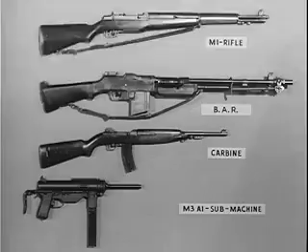The M14 rifle has many of the characteristics of several older weapons. They are the M1 rifle, the previous standard of the United States Army since World War II, the Browning automatic rifle, the carbine, and the submachine gun M3A1. The M14 rifle will, in time, replace these four weapons.

The adoption of the M14, one basic weapon, greatly reduces logistical problems. Moreover, it reduces time for training the user and small arms maintenance personnel.

The new weapon has a 20-round magazine which is quickly and easily replaced. Before removing an empty magazine, the safety is placed on safe. The empty magazine is removed and a loaded magazine is snapped into place so that it is engaged by the rear of the operating rod spring guide and the magazine latch. Now allow the operating rod spring to force the operating rod forward, carrying the bolt with it, to chamber the first round and lock the bolt. The rifle is now cocked and ready to fire when the safety is off.

The magazine also can be replenished from the top with clips of 5 rounds each without removing the magazine from the weapon.

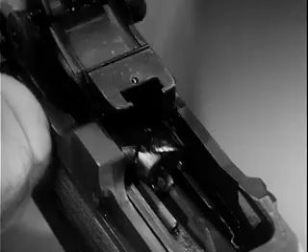To speed up the loading operation for continued firing, the bolt is held to the rear automatically for reloading after the last round in the magazine is fired. This is accomplished by the upward pressure of the magazine follower, forcing the bolt lock into position in front of the bolt. This holds the bolt to the rear while the change of magazine takes place.

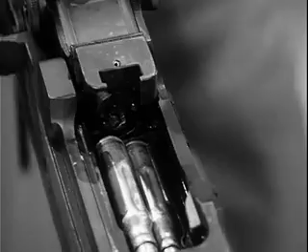By pulling slightly to the rear on the operating rod, the rifleman allows the bolt lock spring to expand, pivoting the bolt lock out from in front of the bolt. This also releases the operating rod. As the operating rod is released, it is driven forward by the expanding operating rod spring, taking the bolt with it. The bolt strips the first round from the magazine for chambering.

Another feature of the M14 is its flash suppressor. Slots in the suppressor act to break up the escaping gases, thus reducing the flash. The suppressor also acts as a muzzle brake, minimizing recoil and giving maximum stability during firing.

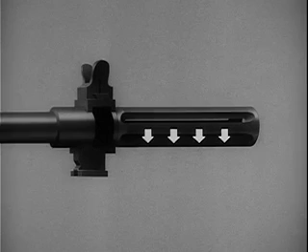This is the way the flash suppressor works. Gas strikes the wide bottom rib of the flash suppressor and exerts downward pressure to keep the rifle stable during firing. Of course, gas escapes in all other directions too.

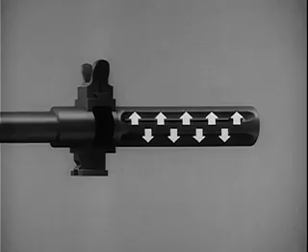When the propellant gas hits the front of the slots, it tends to pull the weapon forward, reducing recoil.

By disassembling or field stripping the weapon, you will become familiar with the parts. To field strip it, first clear the weapon. That is, remove the magazine and check to see there is no round in the chamber. Put the safety in the safe position. Turn the rifle upside down with the muzzle pointing to your left. To remove the firing mechanism, grasp the rear of the trigger guard and pull to your right and pry upward. Then swing up the trigger guard and lift out the firing mechanism.

Separate the stock from the receiver by placing your left hand on the gas cylinder and lifting upward on the butt of the stock. The rifle is now field stripped into its 3 basic groups: the firing mechanism assembly, the stock group, and the barrel and receiver group.

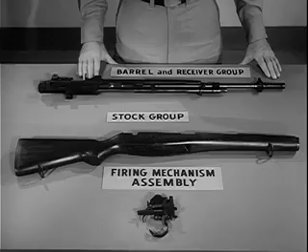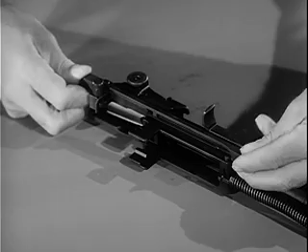To further disassemble the weapon into individual parts, turn the barrel and receiver group on its side with the connector assembly up. To release the connector assembly, press forward on it with the right thumb until the forward end can be lifted off the connector lock. Rotate the connector assembly clockwise until the slot at the rear end is aligned with the elongated stud on the sear release. Then slightly lower the front end of the connector and lift it from the sear release.

To remove the operating rod spring and spring guide, pull forward on the operating rod spring, relieving pressure on the connector lock. Pull the lock outward, then remove the operating rod spring and spring guide.

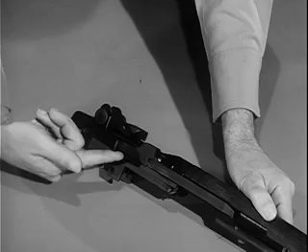Now turn the barrel and receiver group so the sights are up. Retract the operating rod until the guide lug on its lower surface aligns with the disassembly notch on the receiver. Lift the operating rod out and to the rear, disengaging it from the operating rod guide.

To remove the bolt group, grasp it by the roller and, while sliding it forward, lift it upward and outward to the right front with a slight rotating motion. The barrel and receiver group is now field stripped into the connector assembly, the operating rod spring and guide, the operating rod, and the bolt.

These basic groups may be further disassembled if required. The rifle is assembled by reversing the procedure. After reassembly, the rifle should be hand-operated without ammunition to check for freedom of action of the components.

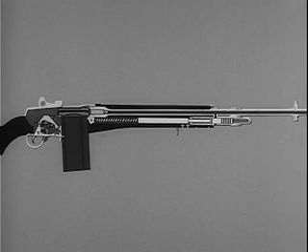The M14 is gas-operated. That is, some of the gas formed by the firing of the cartridge is bled to the gas cylinder.

In the gas cylinder, the gas inside the piston expands. The piston drives the operating rod to the rear, compressing the operating rod spring. Then the compressed operating rod spring expands, driving the operating rod to its forward position.

This combination of backward and forward movements initiated by the firing of each cartridge performs a series of steps known as the cycle of functioning. The cycle of functioning can be broken down into 8 steps. Of course, these are performed as integrated and overlapping actions.

The first step is feeding, which is positioning the cartridge ready for chambering. The second step is chambering, seating the round in the chamber. Third is locking the bolt to the barrel, thus holding the cartridge seated in the chamber so that gas pressure will be maintained in the barrel to propel the bullet. The fourth step is firing, ignition of the primer of the cartridge in the chamber.

Step 5 is unlocking the bolt from the barrel. Step 6 is extraction of the empty cartridge case from the chamber. In step 7, the empty cartridge case is ejected from the weapon. And step 8 is cocking in preparation for the firing of the next round.

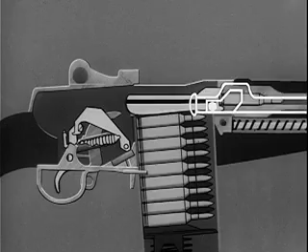The bolt is locked. The rifle is now cocked and ready to be fired when the safety is off. By pressing the trigger, the hammer is released, firing the cartridge.

Part of the propelling gas escapes to the gas cylinder. The expanding gas in the gas cylinder drives the piston and operating rod to the rear, and the bolt with it. On this rear movement, the bolt is unlocked.

The spent cartridge is extracted from the chamber and ejected from the rifle. At the same time, the hammer is again cocked and the cycle is ready to start over.

Now let us see in greater detail how the 8 functions or steps are performed.

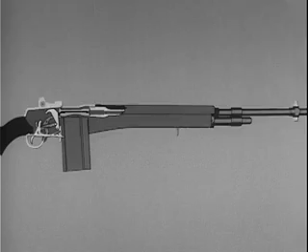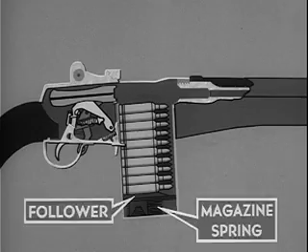When we move the bolt to the rear by hand initially, the bolt clears the top cartridge in the magazine. The magazine spring, exerting pressure against the follower, forces the top cartridge up in front of the bolt in position for chambering. Let us look at it again.

When the bolt is moved to the rear, the bolt rotates. Rotation of the bolt during unlocking cams the hammer slightly rearward. It also moves the firing pin rearward as the firing pin tang contacts the camming surface on the bridge of the receiver.

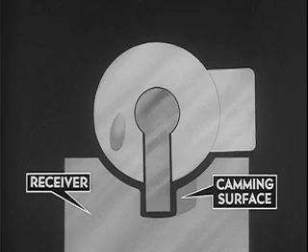As the bolt continues to the rear, the feed rib on the bottom of the bolt forces the hammer to the rear and down, pivoting the hammer on the hammer pin. The bolt continues rearward, riding over the hammer.

The bolt is now driven forward by the expansion of the compressed operating rod spring. The bolt strips the topmost cartridge from the magazine.

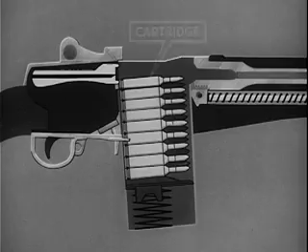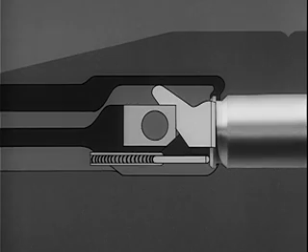The cartridge is deflected upward by the feed ramp in the lower rear of the chamber and forced into the chamber. Also, on the forward movement of the bolt, the extractor on the bolt face is forced outward by the rim of the cartridge. When the face of the bolt comes against the head of the cartridge, the extractor spring expands, and the lip of the extractor engages the extracting groove of the cartridge.

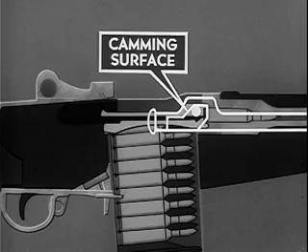Finally, the bolt is locked. Locking of the bolt is accomplished by the rear of the camming surface in the hump of the operating rod. The camming surface contacts the anti-friction roller on the locking lug and rotates the bolt clockwise. By this clockwise rotation, the locking lugs on the bolt are forced into the locking recess of the receiver.

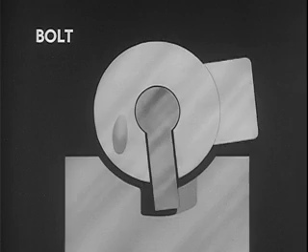Meanwhile, the firing pin tang is aligned with the notch in the bridge of the receiver. The operating rod continues its forward movement for 3/8 of an inch. During chambering and locking, the operating rod is repositioning the gas piston.

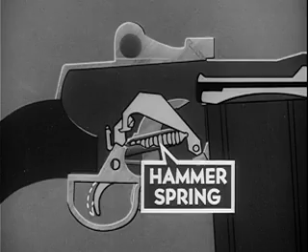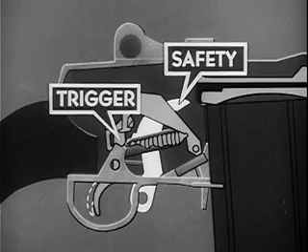With the first round chambered and locked, the next step is firing. Firing, of course, is initiated in the firing mechanism assembly. The firing mechanism assembly consists of the hammer, the hammer spring, which drives the hammer and which is compressed when the hammer is cocked, the hammer hooks, which are held by the trigger lugs, the safety, which engages the hammer and blocks movement of the trigger when in the rear safe position, and the sear.

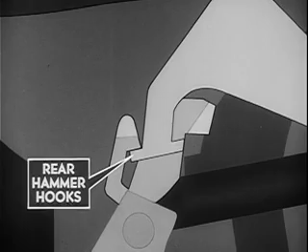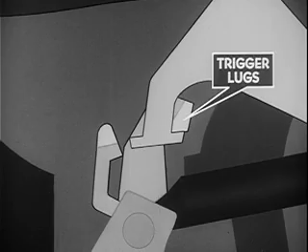The movement of the bolt to the rear forced the rear hammer hooks into engagement with the sear, which prevents the hammer from following the bolt forward. When the trigger is released, the front hammer hook will be engaged by the trigger lugs as soon as the sear releases the rear hammer hooks.

When the trigger is squeezed, the trigger lugs release the hammer hooks so that the hammer spring can drive the hammer forward. The hammer strikes the tang of the firing pin and moves it forward. The firing pin strikes the primer on the base of the cartridge, igniting the powder.

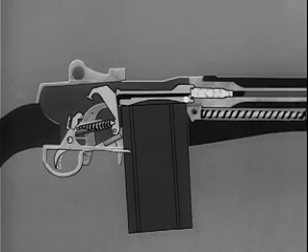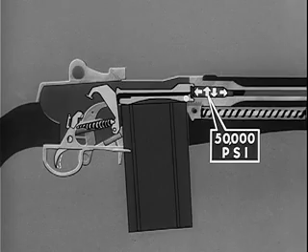When the cartridge is fired in the chamber, gas pressures build up, and a gas pressure of 50,000 pounds per square inch is exerted in every direction. It cannot escape to the rear because the locked bolt holds the case in the chamber, and the brass case is expanded against the chamber walls, effectively sealing the chamber. The gas can only escape by propelling the bullet out through the muzzle of the rifle.

Near the muzzle is the gas port in the barrel, and as the bullet clears the gas port, part of the gas is bled off, entering the gas cylinder and piston. As gas enters the piston, it expands into the gas cylinder plug. Continued expansion of gas builds up a pressure which forces the gas piston to the rear.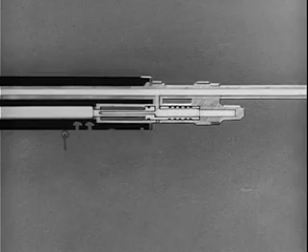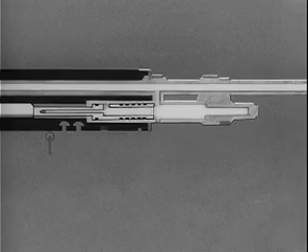The initial rearward movement of the piston shuts off the barrel gas port. The pressure exerted against the piston drives it to the rear 1 1/2 inches. As the piston clears the lower gas port in the gas cylinder, the gas pressure instantly vents to the open air, removing all driving force from the piston.

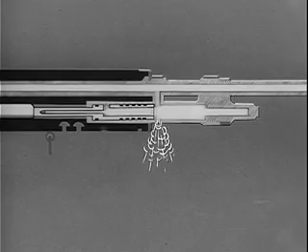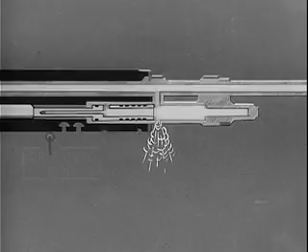During the 1 1/2 inch movement of the piston rearward, the piston is forcing the operating rod to the rear. After completion of piston travel, the force of inertia causes the operating rod to continue to the rear until the termination of recoil. Recoil ends when the shoulder of the operating rod contacts the front end of the receiver.

The operating rod spring now expands and forces the operating rod forward in preparation for firing of the next round. In the forward movement, the front end of the operating rod repositions the gas piston, which comes to rest against the gas cylinder plug. To see how unlocking was accomplished, we will repeat the action.

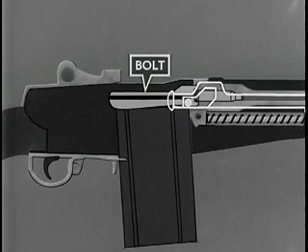When the operating rod moved rearward, it accomplished several things, the first of which was the unlocking of the bolt. Before the bolt starts to unlock, the operating rod permits 3/8 of an inch of free travel to the rear. This is a safety factor, permitting the bullet to leave the muzzle and gas pressure to subside before unlocking begins. This prevents gas from blowing back into the rifleman's face when the bolt unlocks.

At the completion of free travel, the front of the camming surface in the hump of the operating rod comes in contact with the anti-friction roller on the right locking lug. This rotates the bolt counterclockwise, forcing the locking lug on the bolt out of the locking recess in the receiver and unlocking the bolt.

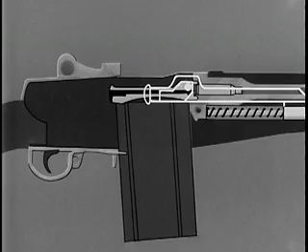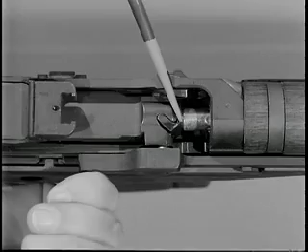While the bolt is being unlocked, slow initial extraction takes place. The rim of the cartridge case is gripped firmly by the extractor. A slow twisting pull called slow initial extraction is imparted by the rotating bolt.

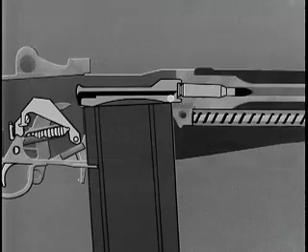Remember that at the moment the cartridge was fired, gas pressure of 50,000 pounds per square inch expanded the brass cartridge case tight against the chamber walls. It also forced the head of the cartridge case against the face of the bolt.

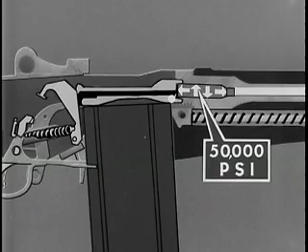To pry the cartridge loose, the slow twisting pull is required. It begins just before unlocking is completed. The corresponding radii of the locking lugs on the bolt and the locking recesses of the receiver, along with the rotation of the bolt, allow a slight rearward movement of the bolt. This rearward twisting action loosens the case in the chamber and causes slow initial extraction. When the bolt continues to the rear, following unlocking and extraction, the spent cartridge is ejected.

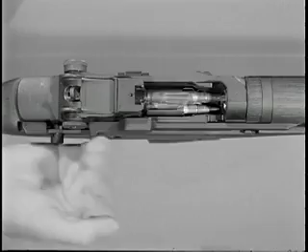This is the ejector in the face of the bolt. The ejector spring is compressed when the ejector is held flush against the face of the bolt. When a round is in the chamber and the bolt is locked, the head of the cartridge compresses the ejector spring.

During extraction, the chamber wall holds the neck of the expended cartridge case in line with the bore. But when the neck of the cartridge case clears the chamber, the ejector spring is allowed to expand. The ejector forces the empty cartridge case to pivot about the extractor, ejecting it from the rifle.

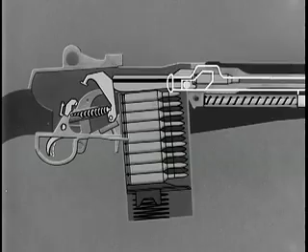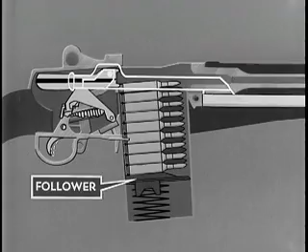After the spent cartridge is ejected, the bolt continues to the rear over the rounds in the magazine. The rounds are under pressure by the follower. When the bolt begins its rearward movement, the hammer is cocked and the cycle is then repeated.

Feeding, chambering, locking, firing, unlocking, extracting, ejecting, and cocking.

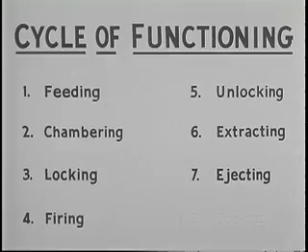The cycle of functioning we have demonstrated is the same whether firing is semi-automatic or full automatic. In semi-automatic fire, the trigger must be released each time before another round can be fired. In full automatic fire, cartridges are fired continuously as long as the trigger is held to the rear.

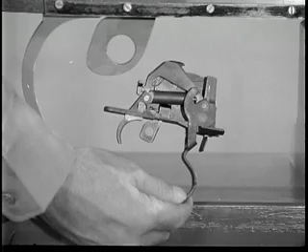Let's see how the mechanism of the rifle can be adjusted to fire either single shots or bursts. To see how the firing mechanism operates, we will use an oversized model. If the firing mechanism assembly were operating at normal speed, recoil would happen so fast that no rifleman firing single shots would have time to release the trigger in preparation for the next single shot.

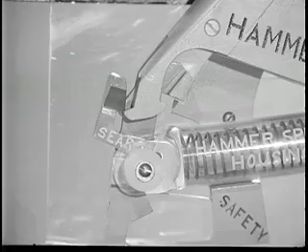To overcome that, the sear is provided. The sear catches the hammer hooks even though the trigger is still being squeezed. When the trigger is released, the rear hammer hooks are released from the sear, and the front hammer hooks are engaged by the trigger lugs. The weapon is now cocked and ready to fire again when the trigger is squeezed.

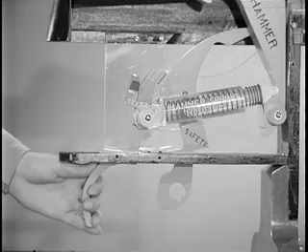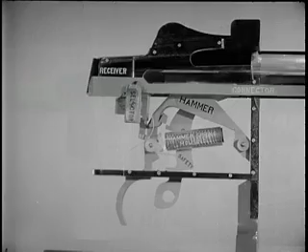To achieve full automatic fire, there must be some way to trip the sear after the bolt is fully locked, while the trigger is being held back. This is done by the selector, the sear release, and the connector assembly. The selector sets the mechanism for either semi-automatic or full automatic fire. When the selector is set in the full automatic position, the connector forces the sear release to trip the sear.

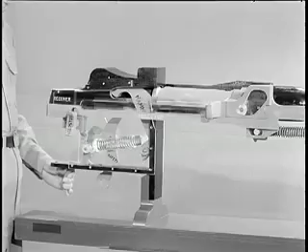M14 rifles equipped for full automatic fire have a selector marked A. To fire full automatic, the rifleman turns the selector so that the letter A faces him. By pressing in on the selector and giving it half a turn so that the letter A is away from him, he sets it for semi-automatic fire.

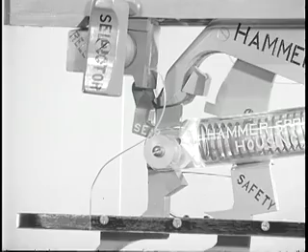When turning the selector to semi-automatic, the movement of the selector rotates the sear release forward on an eccentric shaft approximately 1/8 of an inch, so that it cannot trip the sear. It causes the connector assembly to move far enough forward so there is no contact between the operating rod and the hook of the connector assembly. This positions the sear release so it cannot contact the sear.

At the discretion of the unit commander, the M14 rifle may be issued to troops either with the selector or with a selector lock like this one, which permits only semi-automatic fire.

In summary, the M14 rifle fires the standard NATO 7.62 millimeter ammunition for small arms. It fires semi-automatic, one shot each time the trigger is squeezed. And it can also be set to fire full automatic, that is, delivering continuous fire as long as the trigger is held back and there are rounds in the magazine.

The M14 rifle was developed to incorporate important features of these 4 battle-tested weapons and to replace them. The M14 has great firepower and versatility. It gives reduced weight, ease of logistical support, great reduction in training time, and most important, increased firepower for the individual rifleman.